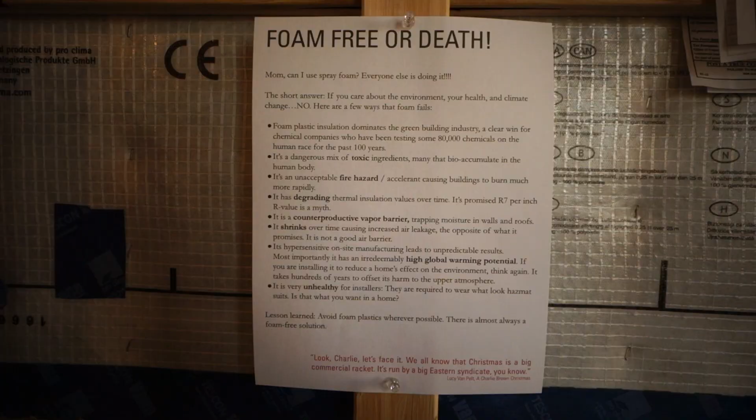Good friend and client, Maura Varadinas, and she and her husband Pete hired us to help design their house. It's a 3-story brick row house. It's pretty typical in Philadelphia, this kind of house, and we're doing a foam-free deep energy retrofit that's guided by passive house principles. And I wanted Maura to just talk a little bit about her history in the neighborhood and why they bought this house and what she's excited about.

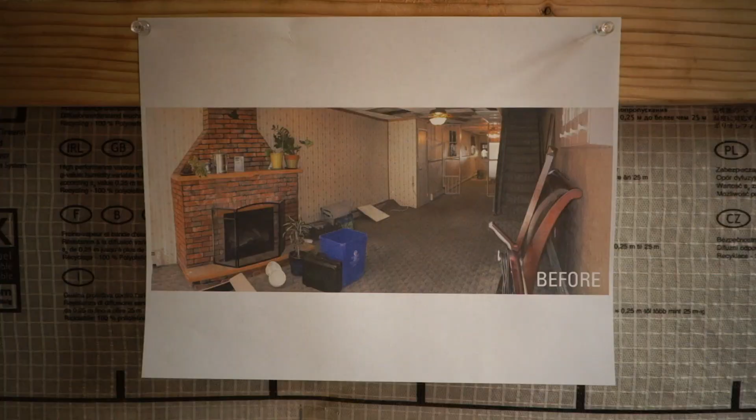So I grew up in this neighborhood, which has been rapidly gentrifying, but was just a working class, kind of Irish, Catholic, Polish neighborhood full of churches and bars. I grew up on this very block. I moved here when I was 3. Across the street. We were already kind of in over our heads, not quite having the budget for the project in the most basic form. We kind of figured we'd make it happen and make it work as we went.

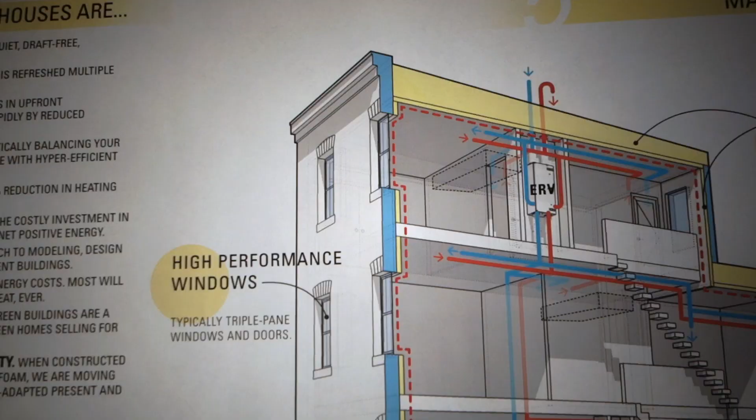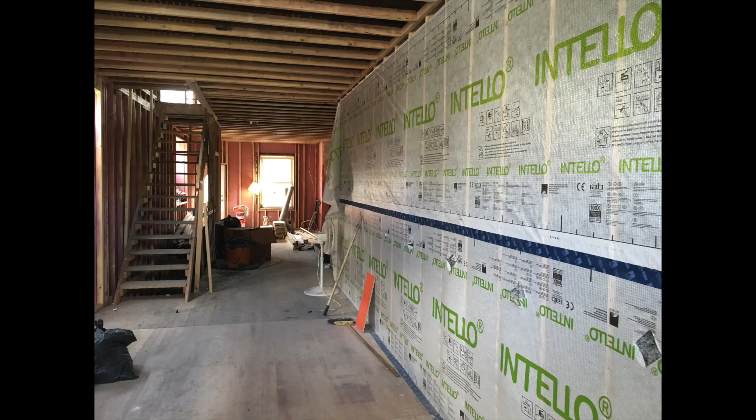And initially we weren't planning on doing this deep energy retrofit. We were going to do a typical spray foam, but Jeremy really convinced our GC and ourselves otherwise. We figured it was a good opportunity to kind of put our money where our mouth is. We claim that sustainability is really important to us, and create our forever home in a way that we could be proud of and know that we were doing the thing that was best for the environment, but also best for us and our family, and setting a good model for the rest of the city in row home renovations.

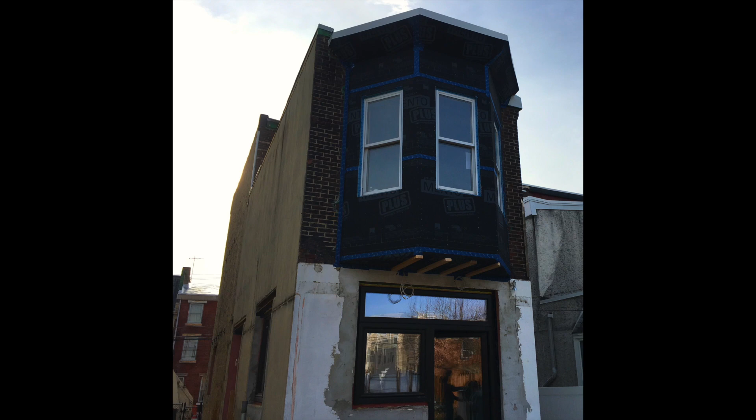One of the parts of the story that I think is really interesting is where he said it's going to cost a little bit more money. And at least the apocryphal version I remember is you're like, well, cool, we just won't do the 3rd floor then right now, right? And so I just feel like nobody does that. It was like, well, we'll just take money out of another part of the project and dump it into the building envelope because that's gonna make a big difference. Right.

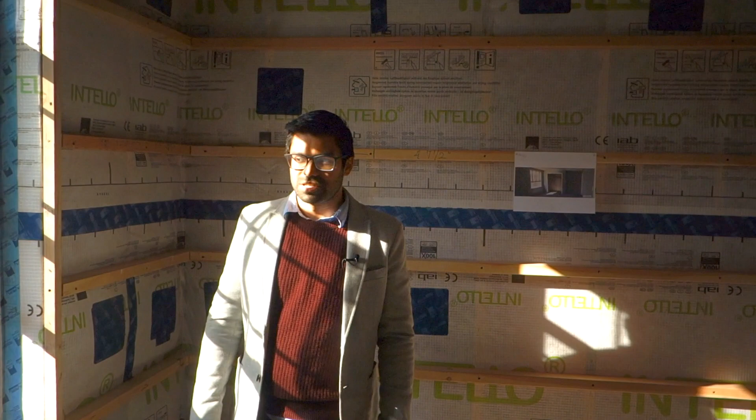My name is Samir Patel. I work for Bright Common Architecture. Most of our projects are revolving around passive houses, and although this one's not going for certification, this is a really good example of what we can do, especially with some old housing stock that's littered all over the coast. There's some key features here that I can point out. Probably one of the main ones would be these old windows. These are the original double pane windows. Nothing special by any means, but we worked with the clients, and the clients made a great decision to keep these. So all the new openings on the 1st floor have the passive windows; for the rest of the house, we'll get those later, and we'll keep with what we have.

I need X, Y, and Z to make me happy, but I don't need to have the most amazing imported tile in my bathroom, or these great marble countertops, or put new floors in the house. We're going to use what's there, right? So figuring what we can sacrifice in the short term so that the long term is done well, and then gradually, as we can afford, replace it. One of the great things is Juan Levy, our contractor, did a great job of installing these so that they can be removed easily and the new windows put in when the budget works for that, so that it maintains the air sealing and the enclosure.

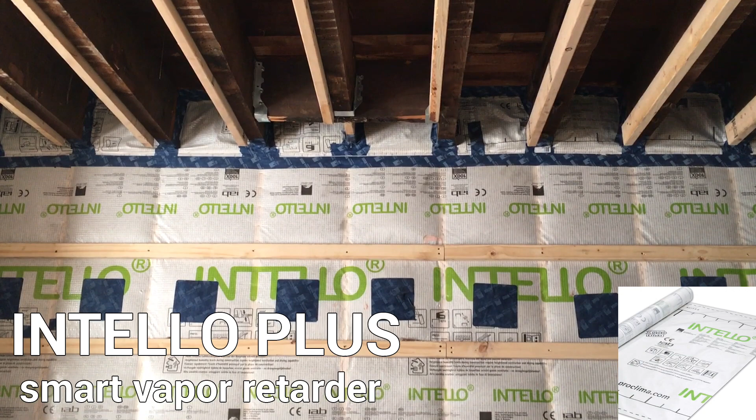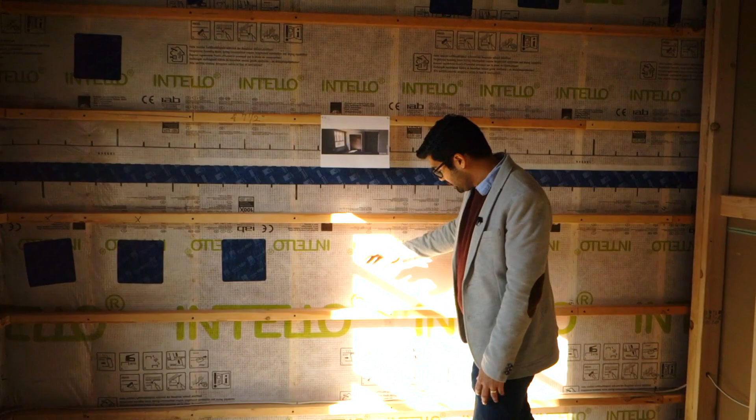Another thing to point out here is all the exterior walls are wrapped with Intello and blown-in cellulose insulation behind them. So that gives us vapor control, moisture control, air control, and then a really good insulation behind that. So you can see all those are taped. And then another great thing that is hard to get on these houses, because they're so small and you end up losing a couple inches around them, is the service cavity, which is a great place for all the electric boxes to run so that you're not penetrating your air barrier.

That can run continuous all the way through, and it makes your electrician's life a lot easier too. The electrician can run his boxes, all his electric wires in here. They can go ahead and drywall right over it. It also helps to keep a flush surface for your drywall. On occasion, the Intello will billow out a little bit when you start filling it with dense packed cellulose, so this gives a good base for it.

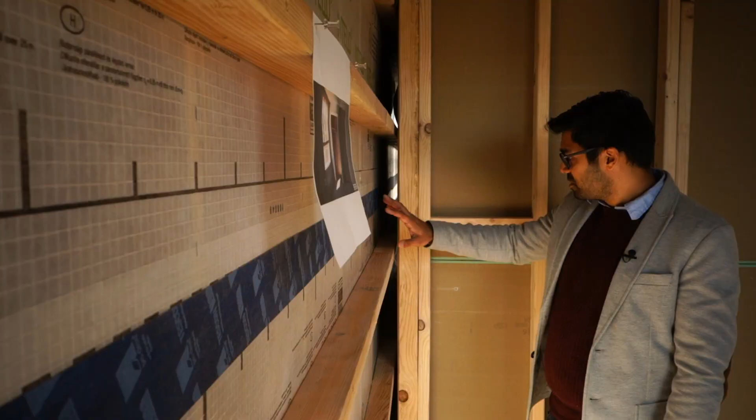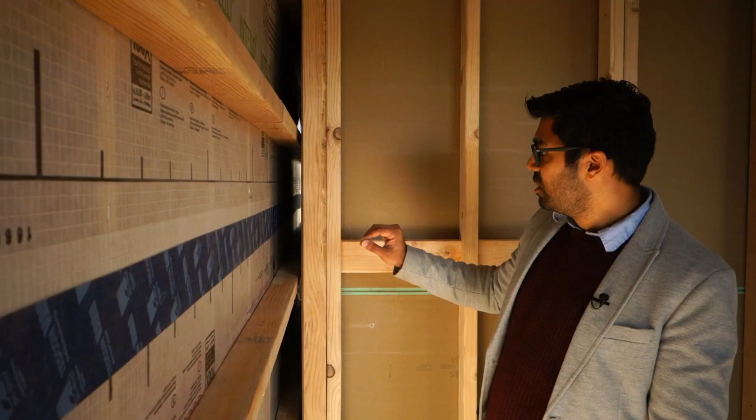Here you can see where the Intello system and the service cavity run continuous all the way through, and the interior partition walls are actually butted right up against that. So all the interior walls come after the fact. This stuff can run clear through. And if you look down at the base there, where the baseboard is, it can run all the way through from floor to floor.

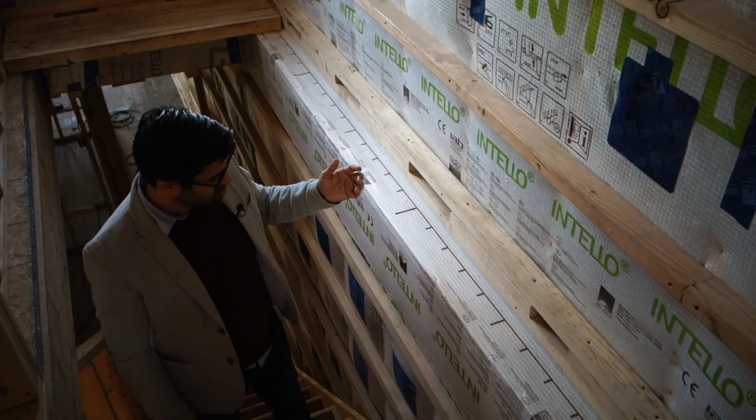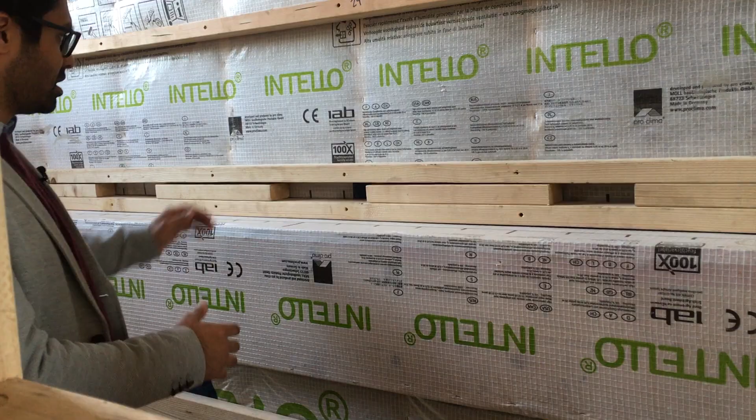So this is a good spot where you can see the fact that the membrane here is continuous all the way through the house. It's kind of a tricky point that happens in these retrofits, where you have to work around existing conditions. So here you can see where the Intello wraps down, comes behind the framing, and actually wraps down to the 2nd floor below and continues right through.

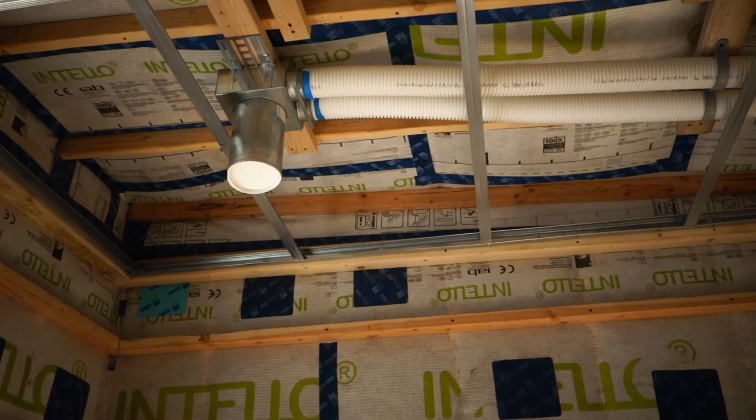Above the bathroom here, and there's a second system below, there are ducted mini splits. Those are really nice. Because we got the heating and cooling demands as low as possible, we can just put 2 of those in, and those do the entire house for us. And the tubes you can potentially see up top here are for the ERV. So there's two ducts coming in, going to a head unit there, which might look a little different than most normal systems, but that is introducing fresh air into the bedrooms and exhausting stale air out of the house.

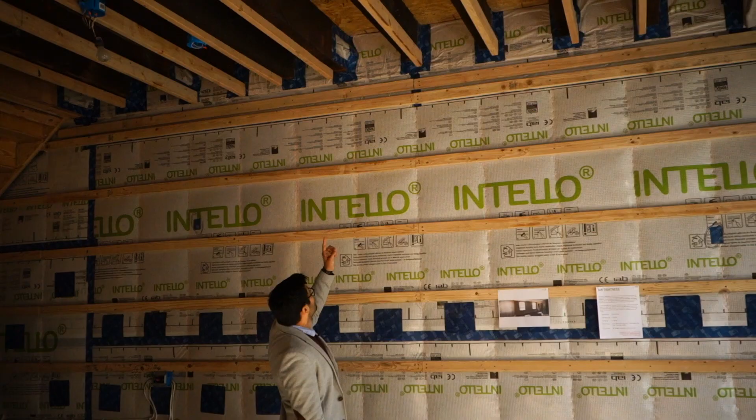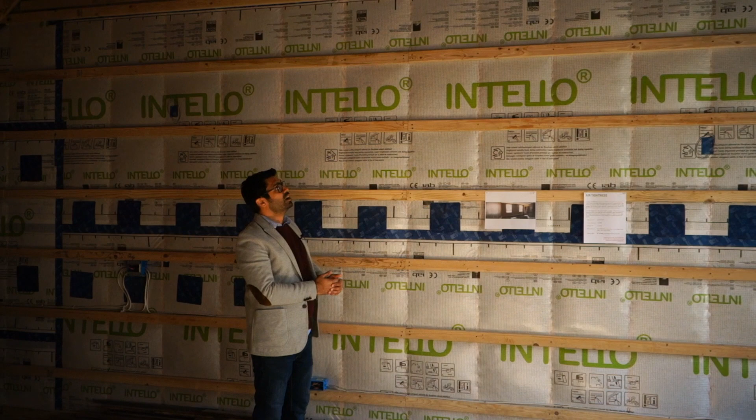Something that comes up a lot in these retrofits of existing homes is the structure's already here, and how do you air seal around them to make a continuous air barrier through the house. So you end up having to put the Intello up through the individual joist bays and tape to the joist so that it creates that seal. And on occasion you have these original floors, so you actually cut back the floors by a foot or 2 so that you can run that continuously through. So it just keeps everything nice and open.

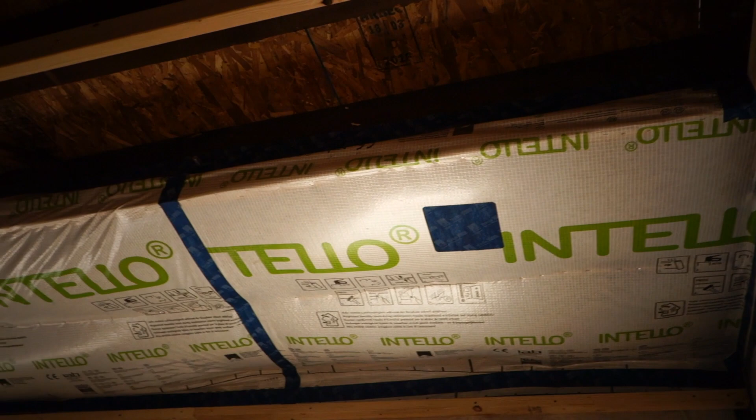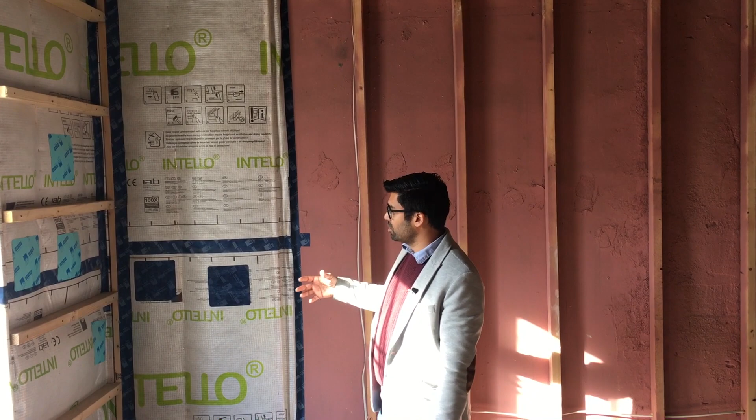Over here, to prevent thermal flanking, they actually insulated the first couple joist bays so that you don't have that cold air transferring in through the assembly and into the house. Over here you have another area where they're preventing thermal flanking. On this party wall here, you have the outside wall that's cold, and the first couple stud bays here are insulated, and that gets taped to the shared party wall, which has a fluid applied air barrier on it. This area is an adiabatic wall shared with the neighbor's house, so we don't have to do the Intello or the insulation here, but we did want to do an air barrier because the brick party wall is porous and will allow transfer of air through it.

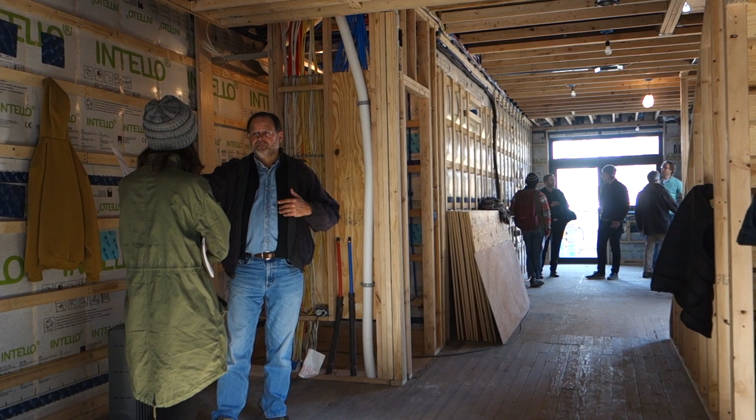Is this a replicable way to renovate homes, row houses in the city? Can you see something like this being something you would tell other people about? I think people just need to be comfortable with it, because everyone doesn't have the money to do everything, right? Most people don't. Sure. This could be realized by lots of people, but you just have to have a different frame of mind that all the things you see aren't going to be just right up front, but all the things you don't see are going to be sustained and done well and comfortable.

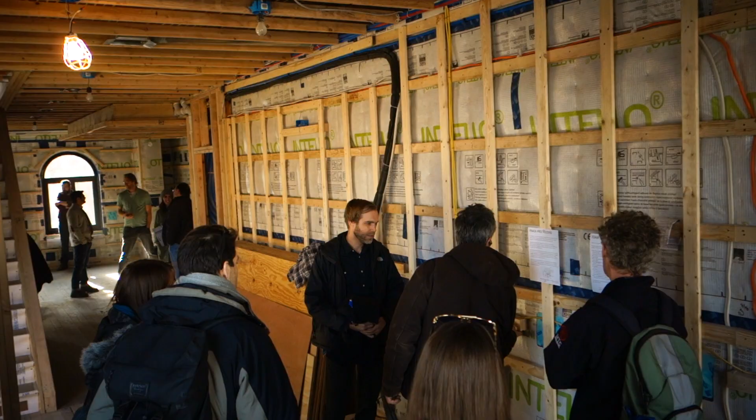I've never lived in a properly temperature controlled home ever, right? The houses I grew up in were always too hot and too cold. My college house, too hot and too cold. My last home, right? So this will be the first house where we're actually comfortable year round.